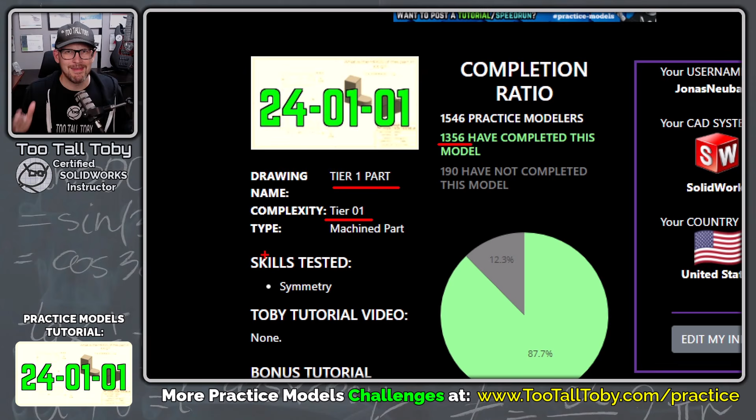So once we get into this practice models app, we can see here that this model has a complexity rating of tier 1. It's actually called tier 1 part. And we can see that 1,356 people have completed this model. Let's see if we can make this 1,357 people, if I can get it right. So we're going to scroll down to the bottom of this page. We're going to click here to begin, and we are going to click reveal drawing. And boom, we are in the challenge.

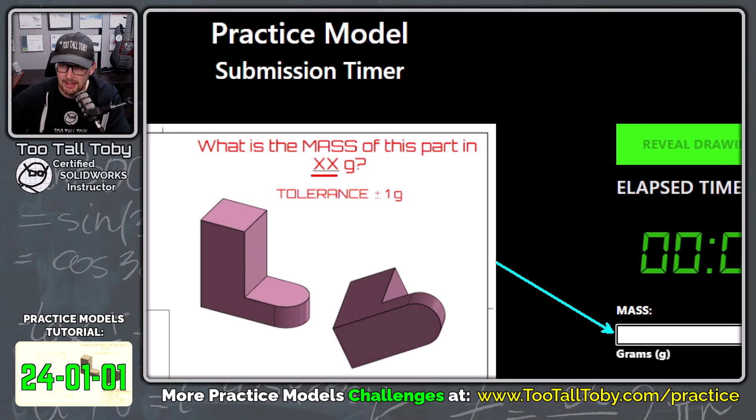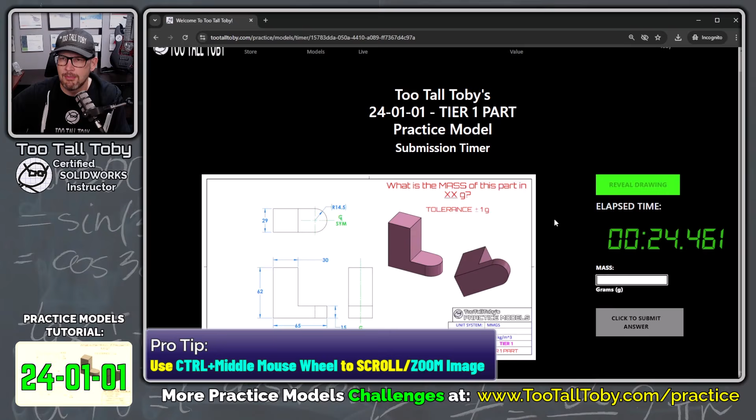So you can see here that there's a field down at the bottom here. It says mass grams. And we can see here that it says, what is the mass of this part in XX grams? So we calculate what the mass is, and then we're going to type that in over here in this box and hopefully come up with the correct answer. So a little pro tip here as we're getting into this beginner's challenge, if you hold the control button on your keyboard and then you roll the wheel, you can zoom in on the web page, and that way you can make this drawing a little bit bigger and a little bit easier to read.

So now we can see here that our challenge is to take this 2D information and turn it into a 3D model. And whenever you're taking a 2D print and turning it into a 3D model, you're going to follow kind of a basic game plan. And the first step of that game plan is going to be, where should my origin be located? And this is something that you'll get better and better at over time. But for this model, I think it makes sense to locate the origin right down here in this corner.

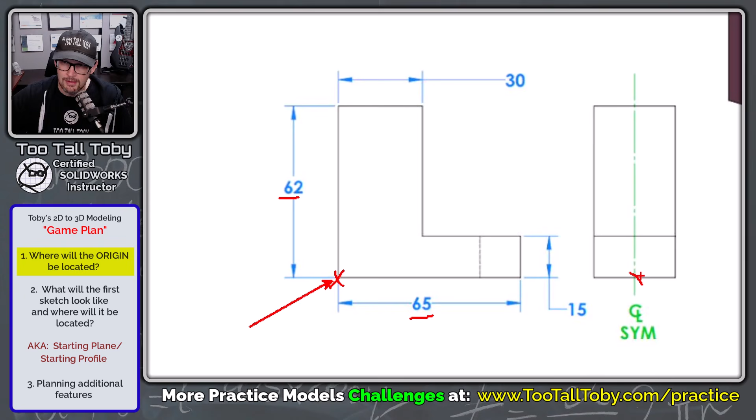This is where the 62 and the 65 dimension are coming from, and they kind of represent the overall dimensions of the part. So I think it makes sense just to kind of anchor the part down here in this corner, and that means we're going to put the origin or the 000 down there in that corner. We're also going to recognize that this part has symmetry, so I think that in this view the origin will be right here, right at the center of the part.

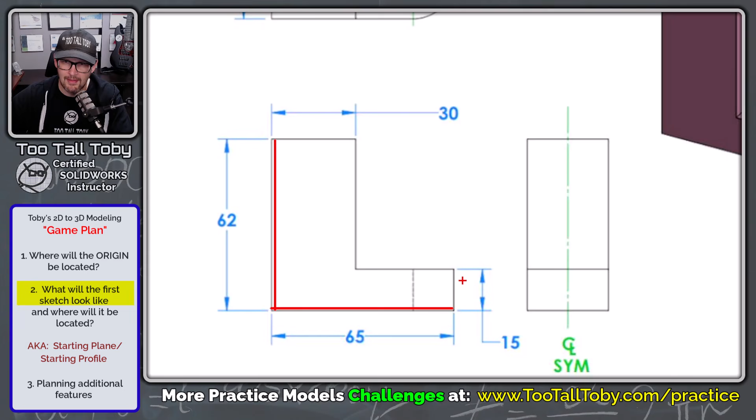So now that we know where the origin is going to be located, the next thing that we need to decide is, what is our very first sketch going to look like? And a lot of times when you're trying to determine the first sketch, you want to capture kind of the overall outside perimeter or the overall envelope of the part. And so in the case of this part here, I think our first sketch is going to look something like this: a line, another line, another line, another line, another line, and then a final line coming across here.

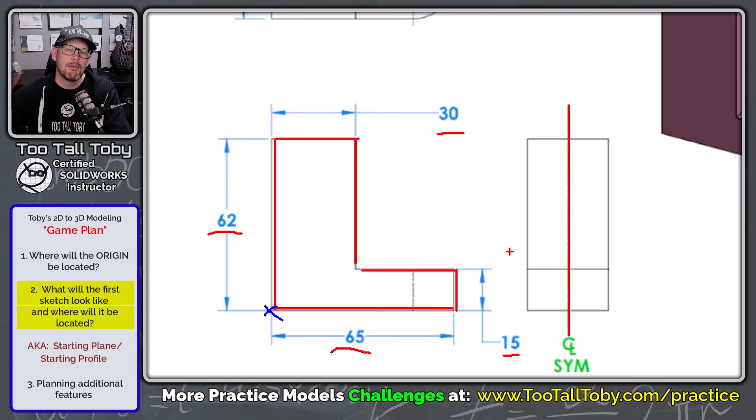And then we're going to go through and we're going to add the dimensions to those lines, or maybe we'll take a look at a pro tip. We'll add those dimensions using auto dimensions in SolidWorks. So we're going to go around, we're going to add in all the information for that sketch. The origin is going to be down here in the corner, and the entire sketch is going to be created here on this mid plane. And once we have that first sketch, we're going to take that sketch and we're going to extrude it using what's called a mid plane extrusion.

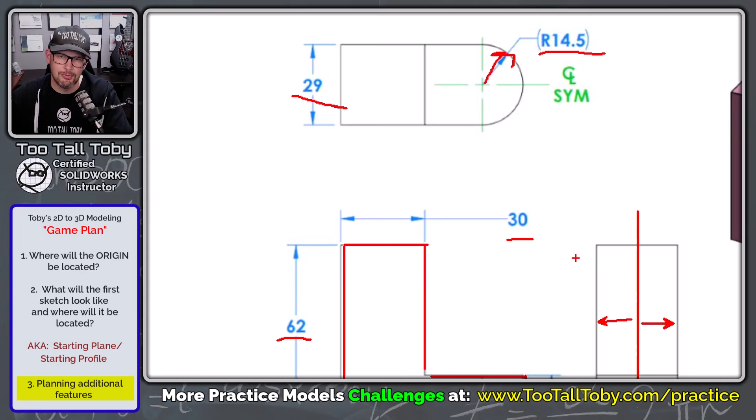So this thing is going to come out to a depth of 29, which means that it's going to go 14.5 in each direction. And then the final feature that we're going to add to this model is simply going to be a fillet with a radius of 14.5. Now we could do that fillet using what's called a full round fillet, but I think that might be a little too advanced for today's demonstration. I think we're going to kind of try to keep things at the beginner level. So we're just going to do that by making a regular fillet with a radius of 14.5.

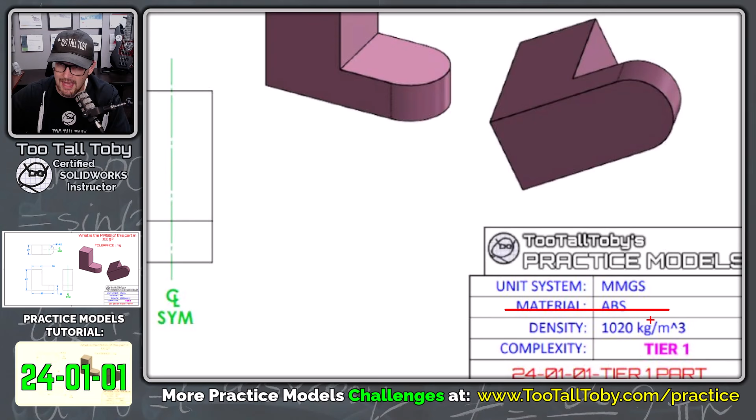So now that we've got our game plan, let's take this drawing and move it over to our second screen. Let's get into SolidWorks and let's begin a new model. Now, if we look at the title block of this drawing, we can see that this drawing is created out of a material called ABS, and it's created on a unit system called MMGS, or millimeters. Well, what I've done is I've created a series of templates in SolidWorks, and one of those templates is for ABS and MMGS.

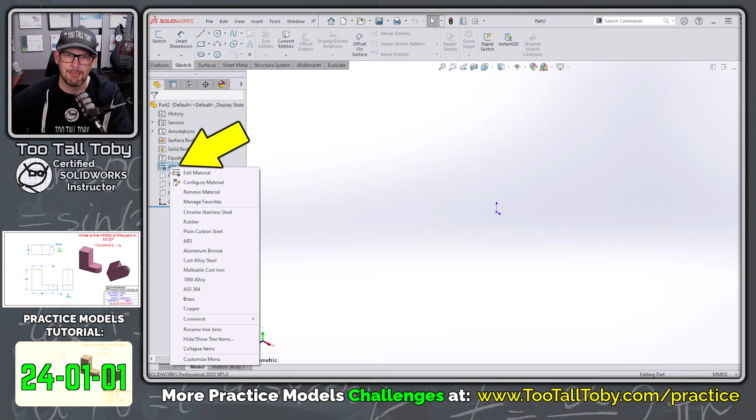If you're not using a template, then you can come over here to your materials folder. It probably says material not specified, and you can choose edit material, and then you can go in and you can find the material in plastics for ABS. You can confirm that the mass density is 1020 kilograms per cubic meter. And you can choose apply, and that will apply that material.

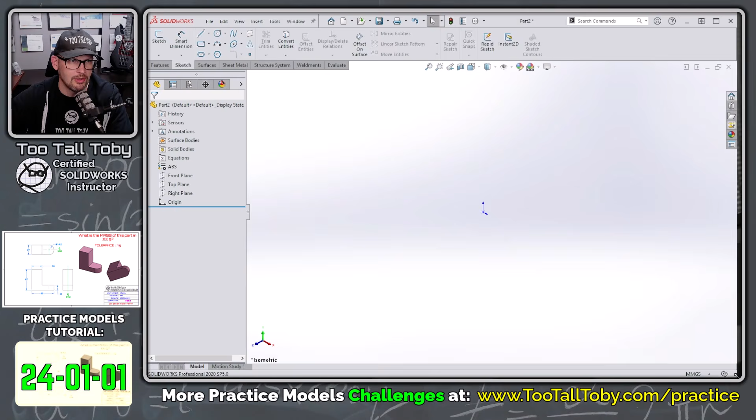You can also go down here in the lower right corner in SolidWorks. This is what's called the status bar down here in the lower right corner, and you can expand this menu here, and then you can choose MMGS or IPS or whatever unit system you need to use. So hopefully you'll be able to set up your templates for the next model. But for this model here, maybe you don't have them set up yet. That's okay. You can just go through and manually set ABS and MMGS.

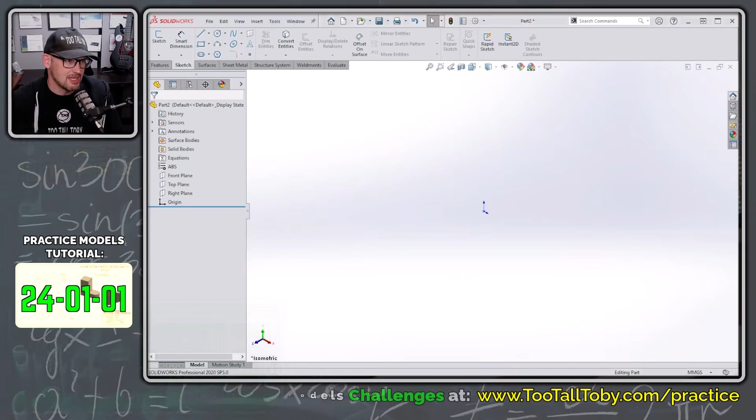So now we are ready to get into our first sketch. And so to begin a sketch in SolidWorks, what you normally do is pick the plane that you want to sketch upon, and you can either left click or right click, and then you're going to choose this icon here for new sketch. It comes up in this little menu up top. So that's going to let you begin a new sketch in SolidWorks. We're going to begin a new sketch here.

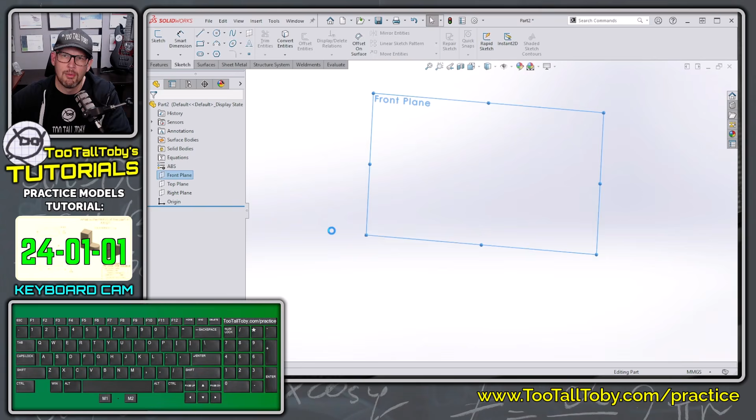And then what we're going to do is we're going to come up here and we're going to choose the line command in SolidWorks. And we're going to take our mouse out onto the screen. And when we take our mouse out onto the screen, we're going to click here on the origin. So just click one time on your mouse and we're going to move our mouse over. And you'll see here that what's happening is I am getting what are called auto dimensions in SolidWorks. Now, this is a super powerful shortcut in SolidWorks.

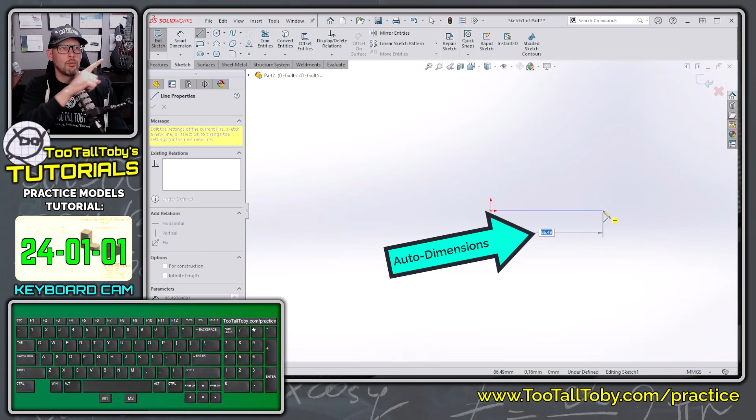But this is something I really recommend that everybody sets up. I'll start using it in the next video. I don't want to lose anybody here in this tutorial, but definitely set up your auto dimensions in SolidWorks.

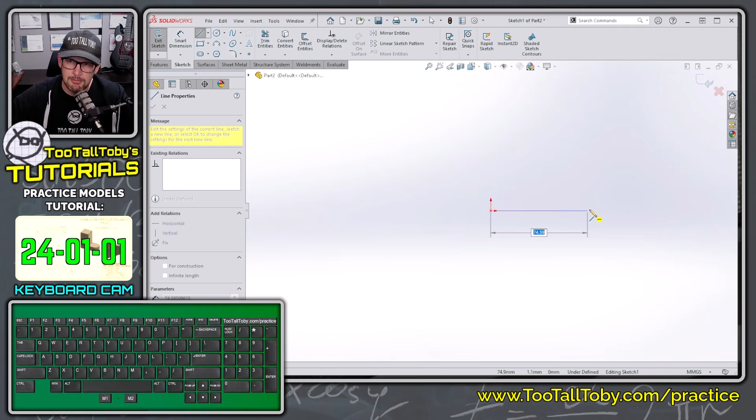For now, I'm just going to move my mouse over here like so, move my mouse up. I'm going to click again, move my mouse over here, click again, move my mouse up here, click again, move my mouse over here, click again, and then I'm going to come back down to the very bottom, click one last time.

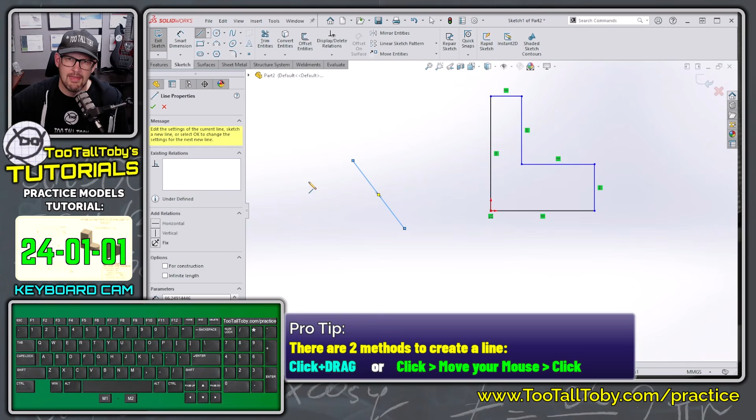So in SolidWorks, when you go to make a line, you can click and drag. So you can click and hold the button down and then drag and then let go. Or you can click and then move your mouse and then click again. And that's two different ways of making a line. I prefer the click, move your mouse, and then click again. I think that's better for making chains of lines.

So I'm gonna hit escape here. So now I'm out of any command, but I'm still in sketch mode. And I'm gonna select this geometry here. I'm just gonna put a window around this geometry here. And then I'm gonna press delete on my keyboard. So come over to your keyboard, press the delete key on your keyboard, and that gets rid of that extra geometry.

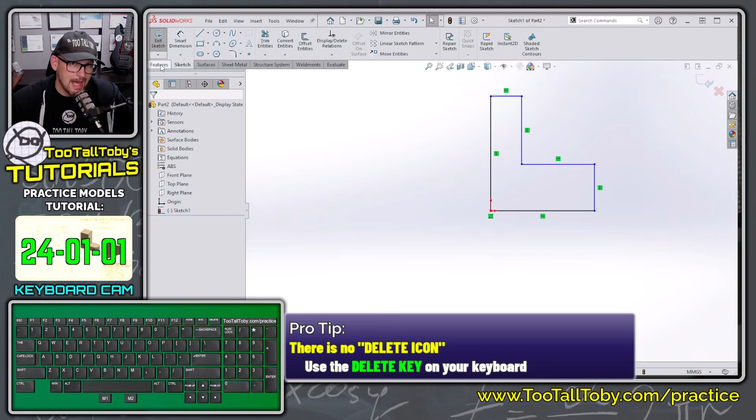So now up here on my sketching tab, this menu up here in the upper section of your screen, this is called your command manager. So this is where you get to all your commands in SolidWorks. I'm going to come up here to my command manager and I'm going to choose the sketching tab and I'm going to choose smart dimension.

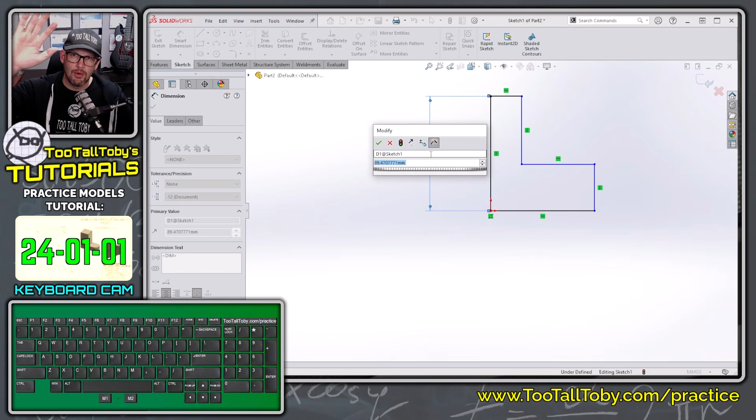And then from the smart dimension command, I'm going to single click on this line. I'm going to move my mouse over here. I'm going to single click again, and then I'm going to let go of my mouse. And when I let go of my mouse, I'm going to type in 62 enter. Then I'm going to move my mouse down here to this line, single click, move my mouse straight down, single click again, let go of my mouse. I'm going to type in 65 enter.

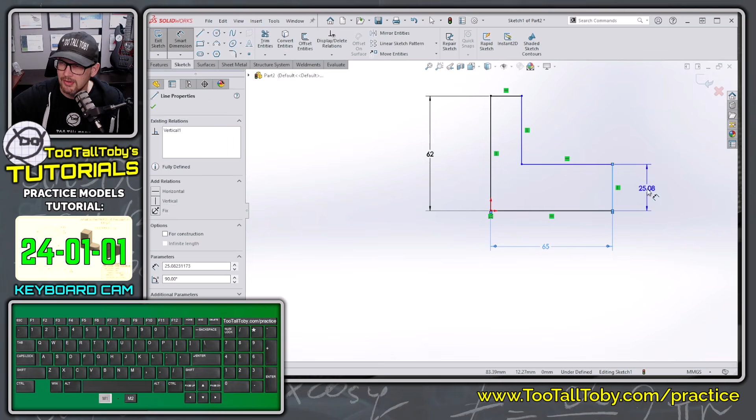I'm going to move my mouse over here. I'm going to single click on this line, move my mouse over, single click. I'm going to type in 15 enter. And I'm going to move my mouse up here to this top line, single click, move my mouse straight up, single click again, let go of my mouse, and I'm going to type in 30 enter. And you'll notice that the sketch changed from blue to black. And that's what we call fully defining a sketch.

And so I actually wrote a song about fully defining your sketches in SolidWorks. I think it's really important to fully define your sketches in SolidWorks.

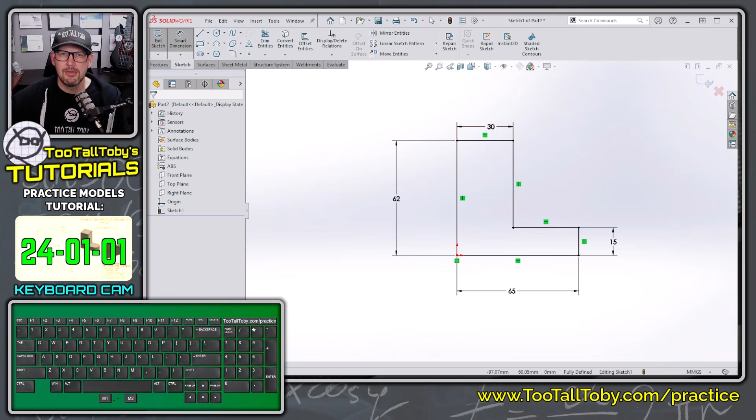And we're going to do that by going up here to our command manager again, this area up here. We're going to click features. And then after you click features, you're going to choose extruded boss base. So we click features, extruded boss base. And then once we do that, we're going to say that we want this extrusion. You notice up here, the first field says from. We're not going to do anything there, so you can just kind of ignore that.

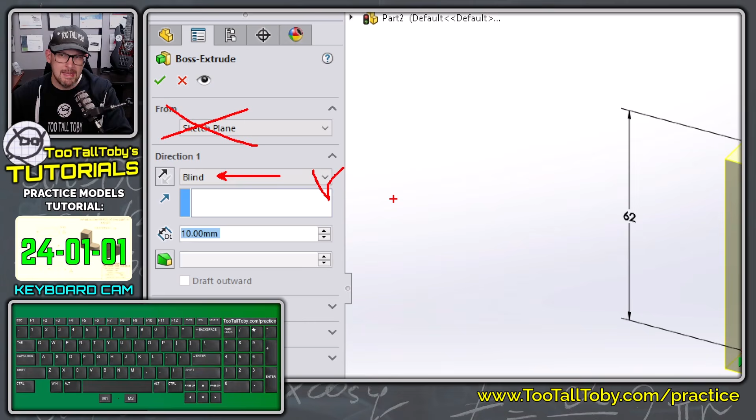We're going to take this extrusion and we're going to change this from being blind to being mid-plane. So change that menu there from being blind to being mid-plane. And then once you make that change to mid-plane, then you can come into this box here where the depth of the extrusion is, and you can type in the depth here of 29, enter, and then you can just press enter again. Enter, enter. And there you go. Congratulations. You've made your first 3D solid here in SolidWorks in this absolute beginner's tutorial.

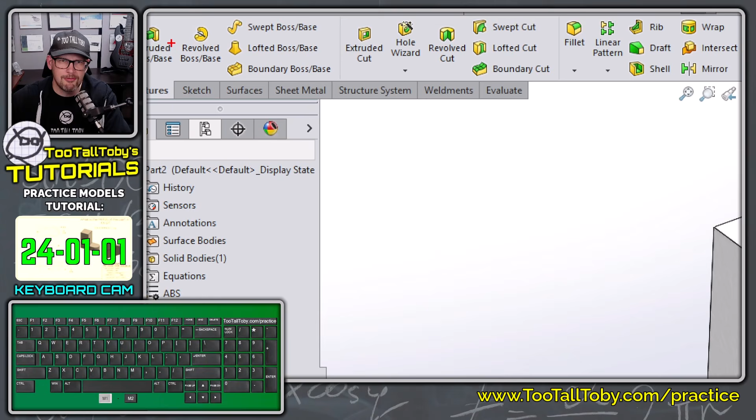Let's finish this thing off by adding what's called a fillet to this edge here and this edge here. So just click in the background, press escape, make sure that you're not in any kind of a command. Come up here to the top, make sure you choose features up here at the top, and then you can come over here to what is called a feature fillet. So we're gonna add a fillet here to this model, and the fillet value here is going to be 14.5. That's going to be the radius for that fillet, 14.5.

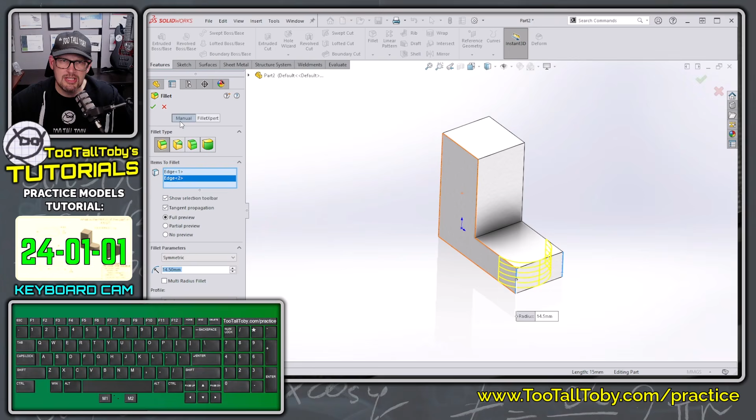You can press enter one time and then set your preview to use what's called a full preview. Set your preview to use a full preview, and then come out here on the screen. You can click on this edge here. You can click on this edge here, and you can hit the green check mark. And look at that. That part looks beautiful. You could save that part if you wanted to. You could call it,

24-01-01 tier 1 part. And then what you can do is you can come up here to where it says evaluate. There's a tab up here that says evaluate. And then if you click on that tab that says evaluate, you can choose mass properties. And this will tell you what the mass of this part is. So it looks like the mass of this part is 69.17 grams. We can just take that number there, 69.17, and Control C for copy, or you could right mouse button and choose copy.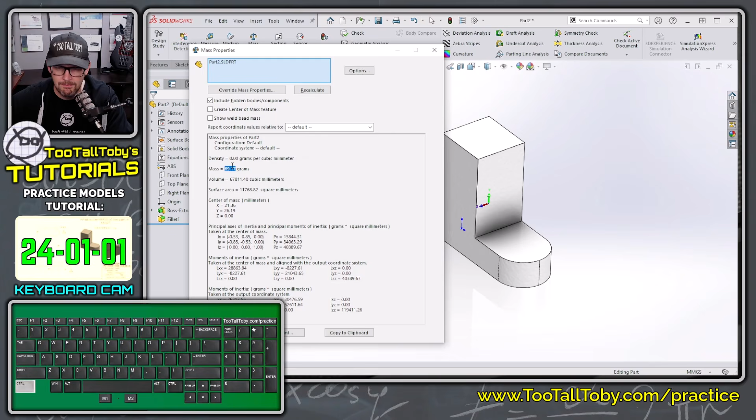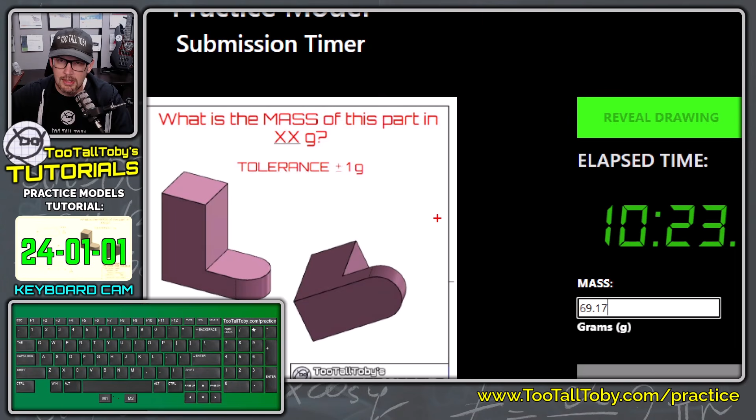And then we can go back to our app here, the Practice Models app, and let's zoom out of this app. I'm holding control and I'm scroll wheeling here. And then I'm going to come over here to where it says mass, and I'm going to press Control V for paste. So there's that 69.17. Now, really, I don't have to include that 0.17. You can if you want, you don't have to. But I don't think you can include the G for grams or the words grams. I think it just has to be a number here. So don't try to type in any letters or anything. Just type in a number.

But as long as you're within this tolerance range of plus or minus 1 gram, it should be okay. So let's see what happens if we say click to submit answer. Oh yeah, that looks good. That means that we did it. If you ever see this purple here show up, that means that you got it right. So here you can see it's saying that our elapsed time is 10 minutes, 41 seconds. I'm going to choose submit and see what happens here. Yes. Congratulations, your answer was within the specified tolerance. Well done. So we are good here.

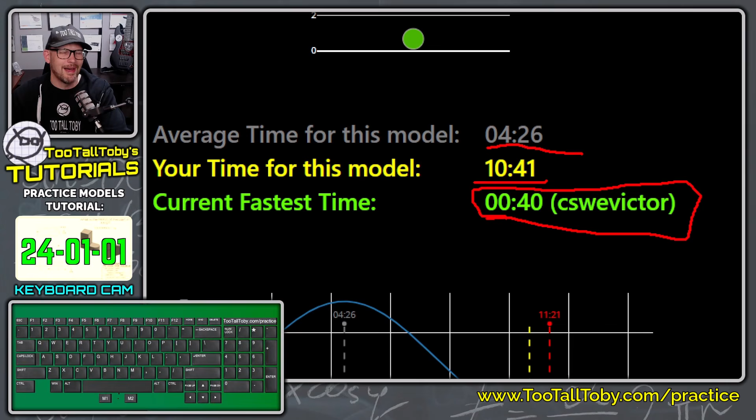And now the other thing that's pretty cool about finishing these challenges is once you're finished, we can go down here, and at the bottom, we can see that our time for this model was 10 minutes and 41 seconds. The average time for this model was 4 minutes and 26 seconds. So we were going a little bit slow on that challenge. And the fastest time came from CSWE Victor. Wow, 40 seconds. Oh my goodness. This guy was absolutely screaming. I actually know who that is.

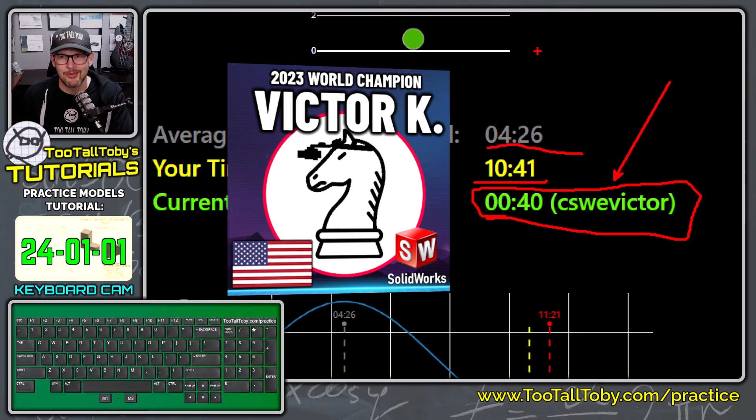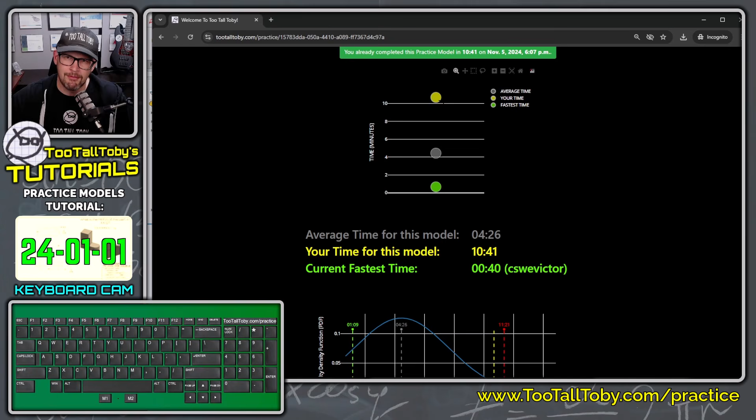That's Victor K, and he was the world champion of 3D CAD speed modeling last year. So it does make sense that he has the fastest time. He is indeed the fastest in the world. He definitely earned that title. So pretty cool stuff here, but we can kind of see how everybody's doing, how we're doing in the field. So it looks like we're running a little bit slower than the rest of the field currently, but I think that if we keep practicing these challenges, we're going to get faster and faster.